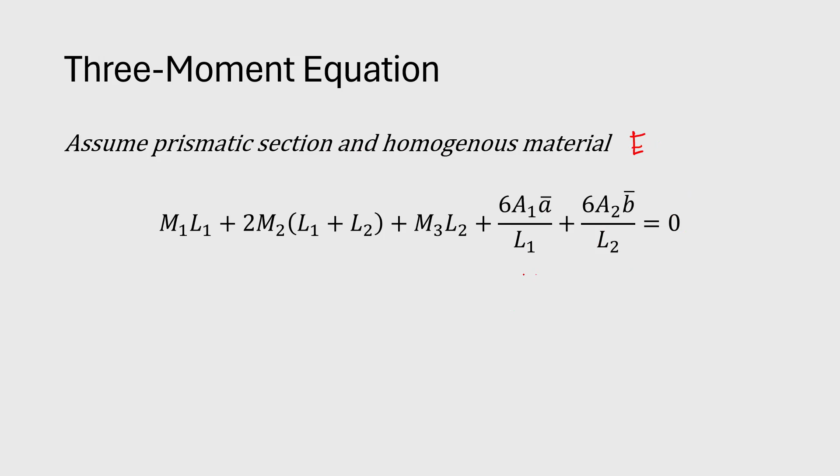But there's another formula existing, involved in the three-moment equation. This is the three-moment equation, but it is not equated to 0. We have an additional term on the right side of the equal sign: 6EI times H1 over L1 plus H3 over L2. So this equation considers the settlement, or the vertical displacement, of the three points.

So how do we define our three-moment equation? Let's say we have here a continuous beam. This is point 1, point 2, and point 3. This is based on what we learned in theory of structures to determine the internal moments of each support. This is what we'll call L1, this is L2. And M1 is the moment at point 1, M2 is the moment at point 2, and M3 is the moment at point 3.

Then 6A1 A-bar refers to our left span - considering the left span, that's 6A1 A-bar over L1. The actual calculation of that, I won't discuss in this video. Maybe I can create another video regarding solving our 6A1 A-bar over L1. So here, we'll just use the predefined formulas you'll see in the next slide: 6A1 A-bar over L1, and this one is 6A2 B-bar over L2. This is for the left span, and this is for the right span.

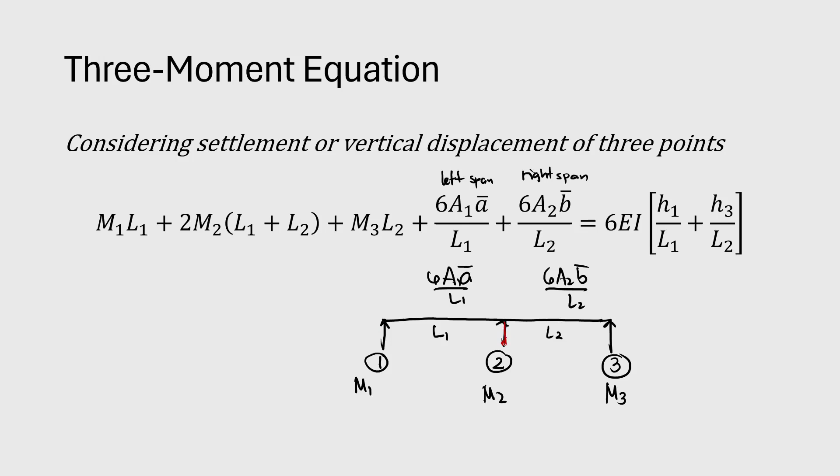Okay, now what do H1 and H3 mean? This is based on the positioning of our points 1, 2, and 3. For example, let's say we have a beam where the point goes down - let's say it experienced settlement or vertical displacement. So our beam becomes like this, and this is the new position of point 2, the new point 2. So now what we'll do is define H1. Our H1 is the vertical displacement of point 1 with respect to point 2.

Let's put a definition. H1 is vertical displacement - or vertical distance rather, instead of displacement.

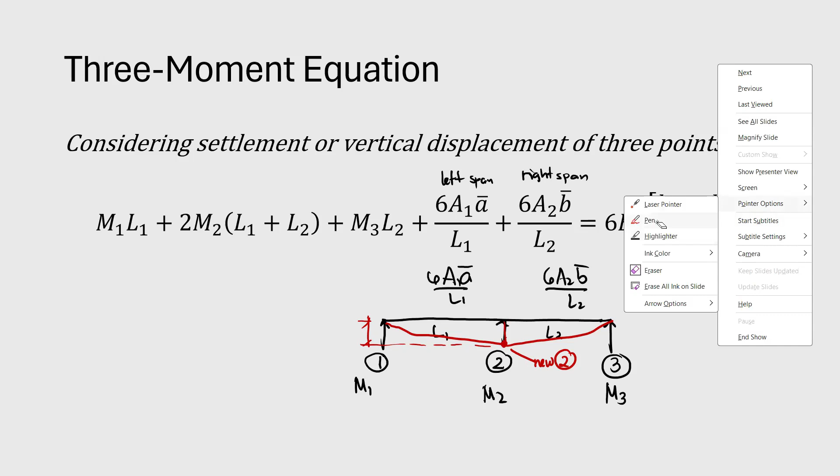Vertical distance of point 1 and point 2. Then, the H3, here it is. This is our H1, and this is H3. That is the vertical distance of point 3 and point 2. Okay, so that's how it is.

We're defining this. Now, how about the sign? The sign of H1 and H3 is based on the position of point 2 with respect to point 1 and point 3. Later, we'll explain how to do it.

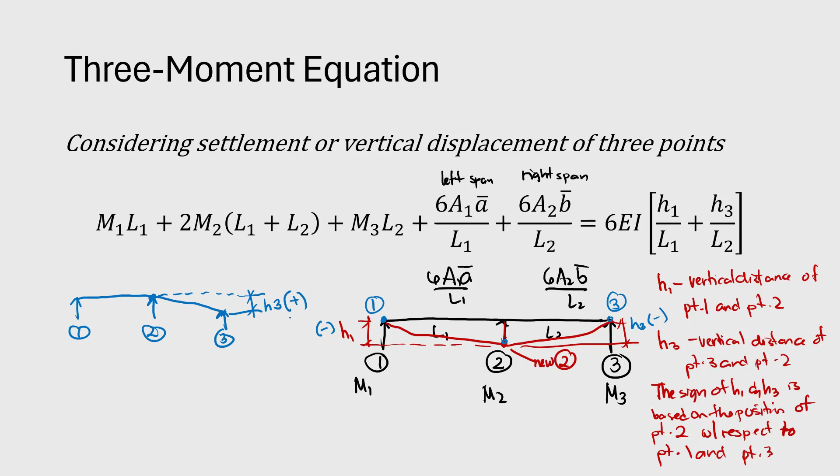Now we're ready to use this three-moment equation to solve for deflection. Let's have an example, very simple at first. By the way, we'll just use this three-moment equation as long as these formulas are given.

6A1, A-bar over L1, is already defined, so we won't consider very diverse loadings here because that would give us a very difficult discussion. Maybe I'll create a separate video regarding computing that. 6A1 A-bar over L1, and 6A2 B-bar over L2 — these are the predefined formulas we can use.

Aside from that, another limitation is we can't solve for the location of our maximum deflection here, especially when the loadings are not symmetrical, or when the loads on our beam are a bit complicated. It is possible, but it would take a lot of time to discuss. But in most problems given to us in the board exam and in our quizzes, it's mostly simple supported beams and cantilever beams, and the location is defined.

Instead of looking for the location of maximum deflection, what we can solve here is, for example, given the position or point where you want to get the deflection — for instance, what is the deflection at a distance of 3 meters from the left support or from the right support? If that's our problem, we can solve the deflection. But the maximum deflection location, especially when it's non-symmetrical or the loadings are very diverse, we won't focus on that using the three-moment equation, okay?

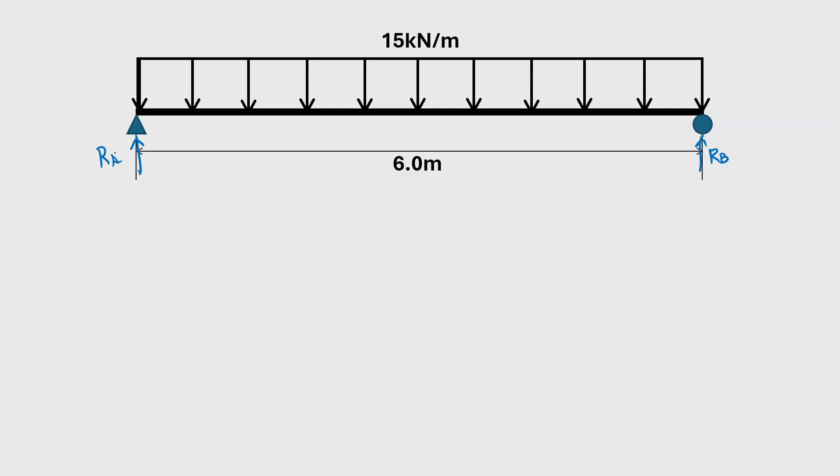So let's have an example. Here's our uniform distributed load, with a simply supported beam. First, let's analyze this beam. Our beam has a reaction RA and also a reaction RB here. When we compute this reaction, it's just half of the total load. So this is 45 kilonewtons, and this is 45 kilonewtons.

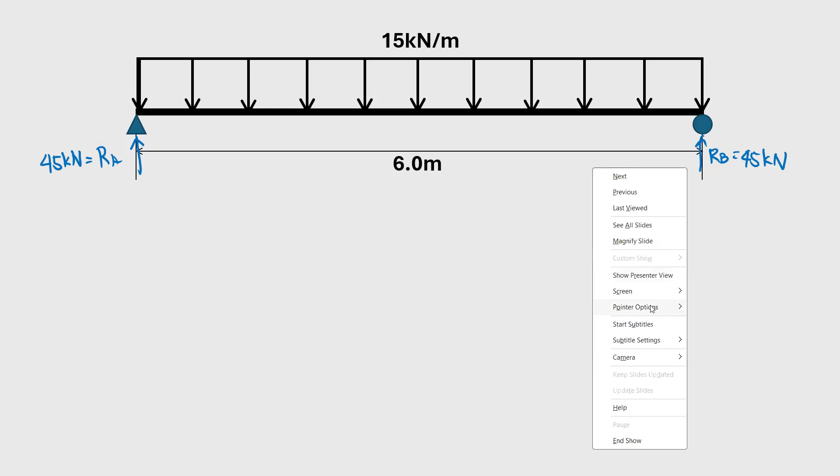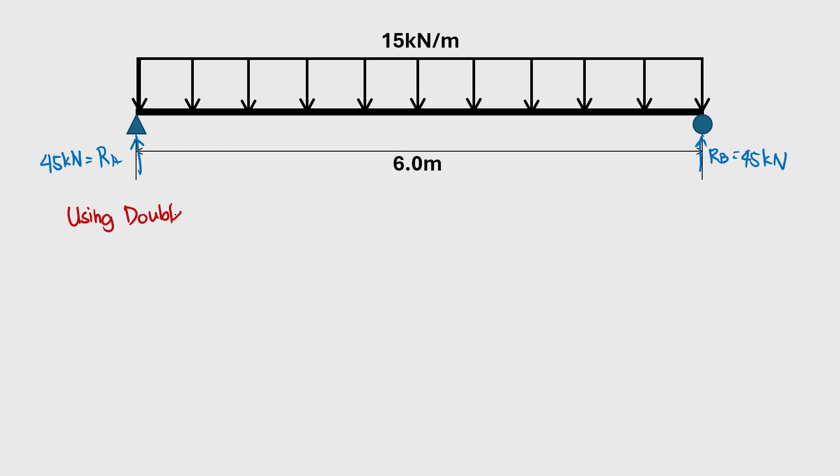Okay, so let's use a different method first to determine the deflection of your beam. One of the most efficient methods, for me, is using the double integration method. Using this method, we get the deflection all throughout the beam — just one formula, then whatever distance or location you want, we can get the deflection. The tricky part about it is getting the equation; if we make a mistake in the equation, we'll be wrong in getting the deflection of our beam.

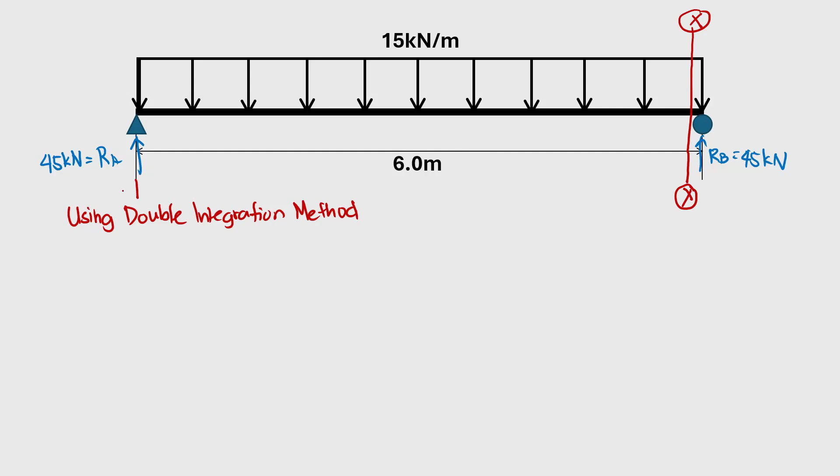So what we do in double integration is we cut here, at the point nearest to the end. Let's name it section XX. Then we assume that on the other side of that section is our starting point, where x equals 0. So let's mark this as our starting point of analysis. Then, from this point to our section XX, the distance is x. Okay, so let's label the distance x.

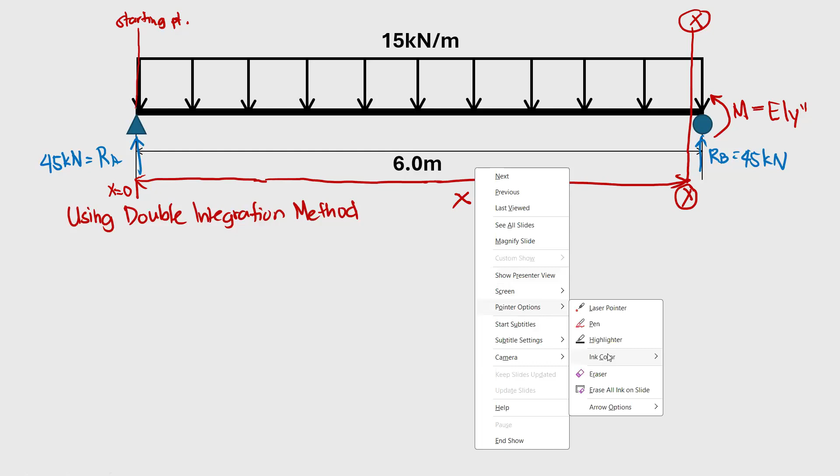After that, we release the internal moment at that section XX, and this internal moment is equivalent to EI y double prime. So we do static analysis through summation of moment at that section XX to get our moment equation.

So summation of moment at section XX equals 0. My way of calculating is clockwise equals counterclockwise. All clockwise rotations at that point go on the left side, counterclockwise on the other side. For example, the 45 kilonewton multiplied by distance x, aside from that, wala na, so we equate.

Our counterclockwise is EI y double prime, plus our uniform load, that is 15 times x over 2. So our equation now is EI y double prime equals 45x minus 15x squared over 2, or let's simplify it to 7.5x squared. This is our moment equation.

Next, we integrate that. When we integrate, we get what's called the slope equation. So our slope equation is EI y prime equals 45x squared over 2 minus 7.5x cubed over 3, plus C sub 1. This is our slope equation.

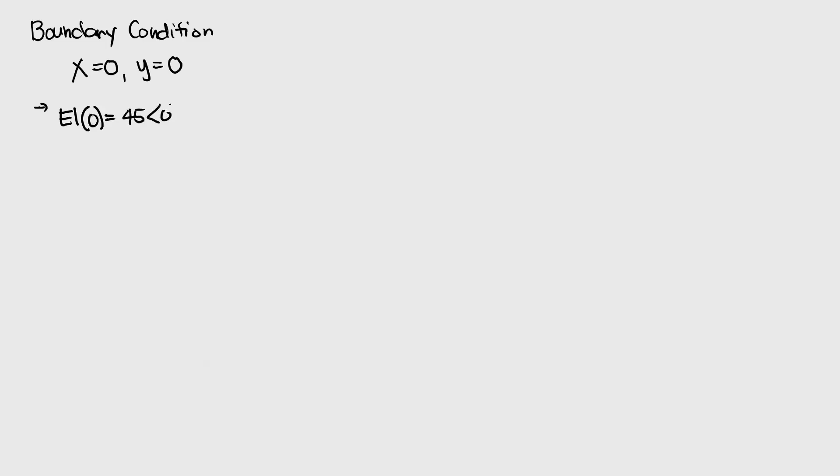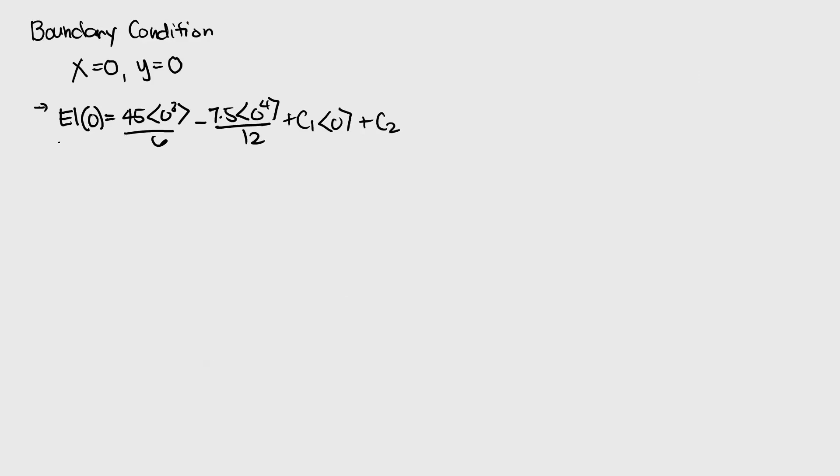Substituting this into our deflection equation, we get EI times 0 equals 45 times 0 cubed divided by 6, minus 7.5 times 0 raised to the fourth power over 12, plus C sub 1 times 0, plus C sub 2. Everything cancels out, so therefore C2 equals 0.

Another boundary condition is when x equals 6 meters, at the other end of the beam, y equals 0, since we're talking about deflection. Substituting these values into our deflection equation: 45 times 6 cubed divided by 6, minus 7.5 times 6 raised to the fourth power over 12, plus C sub 1 times 6, plus C sub 2. These terms are 0, so therefore our C sub 1 is negative 135.

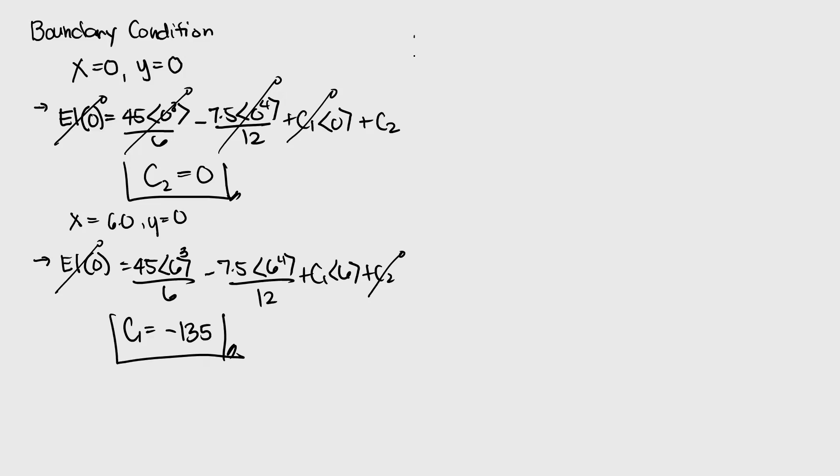After determining this, we can now solve the deflection. For example, find the deflection at midspan, where our distance x equals 3.0 meters. Just substitute into the deflection equation: EI y equals 45 times 3 cubed divided by 6, minus 7.5 times 3 raised to the fourth power over 12, plus negative 135 (our C sub 1) times 3, plus 0 for C sub 2. So our EI y is equivalent to...

negative 2025 over 8, or our y is negative 2025 over 8 EI. This is our final answer, the midspan deflection.

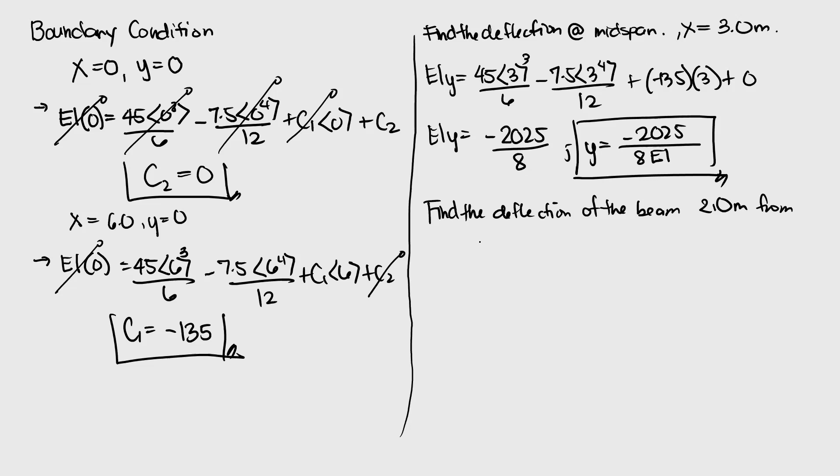Next, find the deflection of the beam 2 meters from the support. This means x equals 2.0 meters. Substituting into EI y equals 45 times 2 cubed over 6, minus 7.5 times 2 raised to the fourth power over 12, plus negative 135 times 2, plus 0.

So our y here is negative 220 over EI. That's how we compute the deflection using double integration.

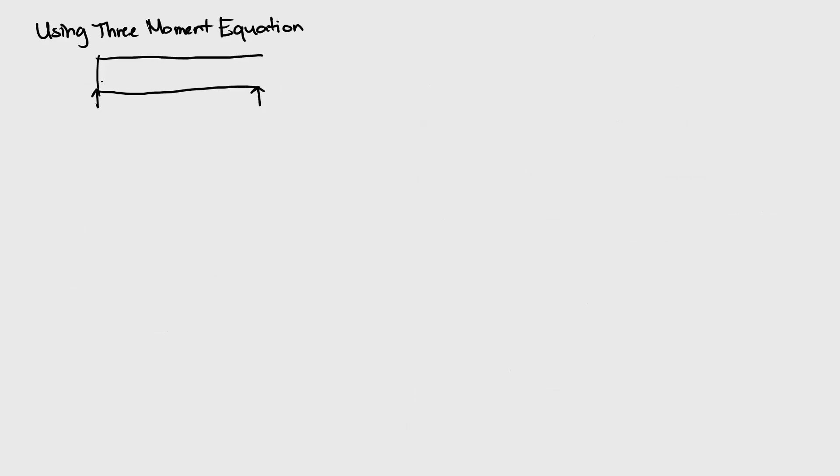Now we will start solving the deflection using the three-moment equation. First, let's draw the beam, carrying a uniform load of 15 kilonewton per meter, with a length of 6 meters.

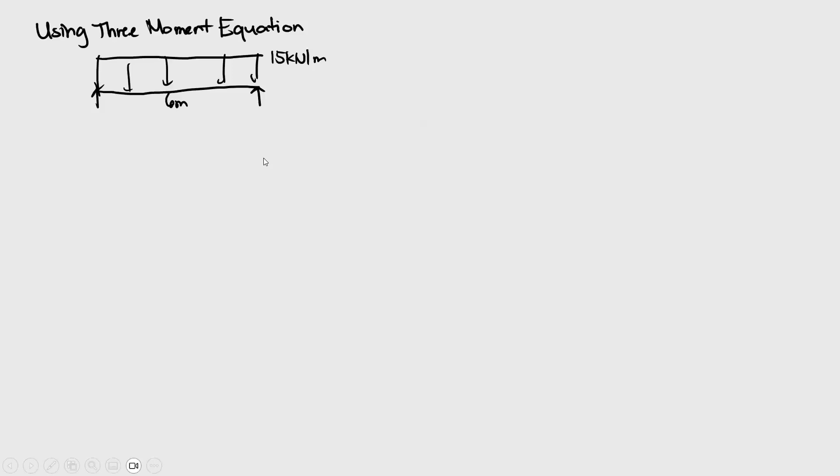So next, i-drawing natin yung ating deflection, exaggerated na deflection. Alam naman natin na deflection at midspan. Ito yung pinaka-maximum deflection, or let's say Y.

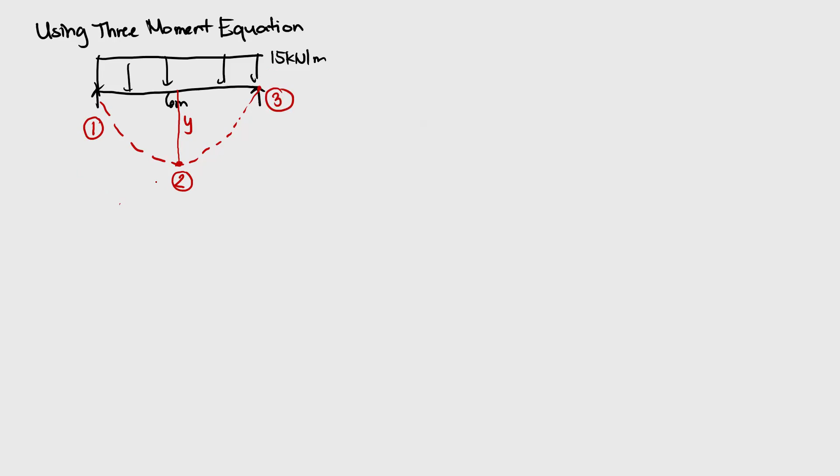Dito, pagka gagamitin natin yung three-moment equation, yung isang point natin, kasi alam natin pag three-moment equation, tatlong support. Eh kaya lang, yung simple supported din, dalawa lang. So paano na? Isang point natin ay yung kung saan natin computin yung deflection natin. Therefore, ito yung magiging point 1, ito naman yung magiging point 2, and ito yung magiging point 3 natin. As you can see, meron ng vertical displacement or vertical distance yung ating point 2 with respect to point 1 and point 3.

So after defining this, makukuha na natin yung ating L1 tsaka L2 natin. Ito yung L1 natin, that is 3 meters. Yung L2 natin ay 3 meters din. Dito yung ating 6A1, A bar over L1, at ito naman yung 6A2, B bar over L2.

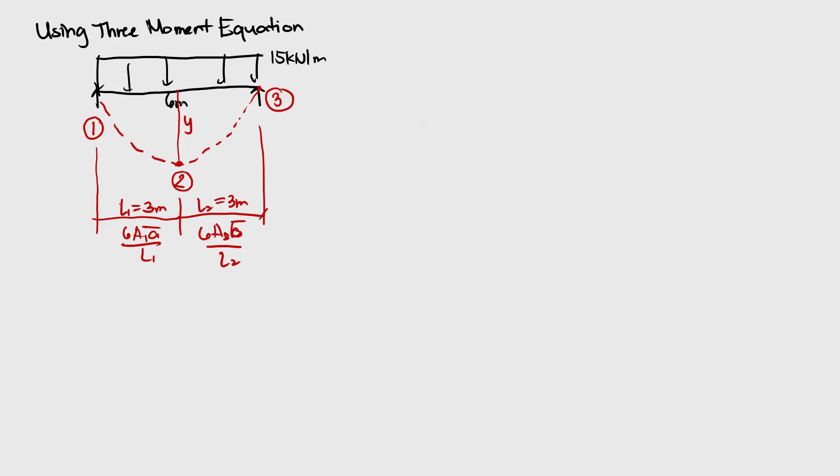Then kailangan natin computein yung ating moment. M1, yung moment pagka sa support ng simply supported beam, lagi yan 0. 0 kilonewton meter. Then yung M3 din ay 0 kilonewton meter. How about yung M2? M2 naman, that is the moment at midspan.

May formula tayo dyan, that is WL squared over 8. If you don't know the formula for the moment at midspan ng UDL, or uniformly distributed load sa simply supported beam, you can try using shear moment diagram para lang makuha yung moment, or by cutting the beam at this section at midspan.

So by substituting yung ating mga given values doon sa formula ng moment, that is equivalent to 15 times 6 squared over 8. So ito ay equivalent sa 67.5 kilonewton meter. Positive yan yung moment natin at midspan. And then after determining this, pwede na nating i-determine yung ating location deflection natin, yung para sa H1 and H3 natin.

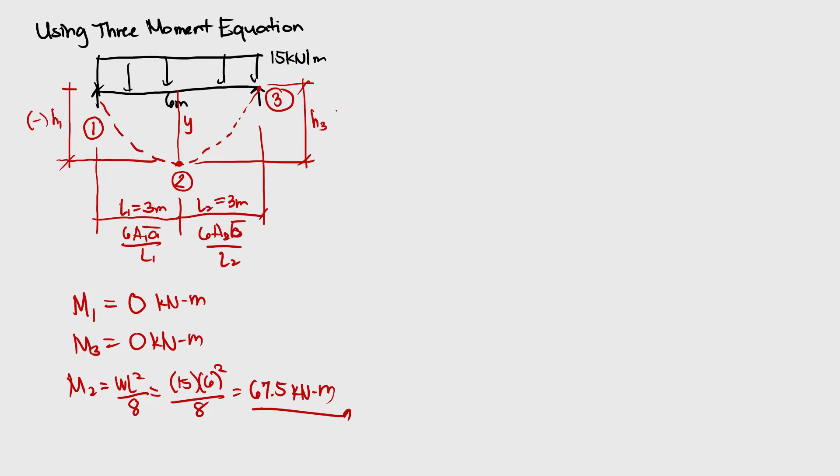Yung H1 and H3. As you can see, yung ating point 2 is below at point 1. Therefore, yung ating H1 ay negative, and yung point 2 natin is below din ng point 3, so ito ay negative. Okay, so using the three-moment equation,

Yung three-moment equation natin ay M1 L1 plus 2M2 (L1 plus L2) plus M3 L2 plus 6A1 A bar over L1 plus 6A2 B bar over L2, that's equivalent to 6EI times (H1 over L1 plus H2 over L2, or H3). H3 yan.

As you can see, yung ating moment sa 1 at 3 ay 0, so itong term na to ay pwede natin i-cancel out, magiging 0 na lang. So substituting yung ating mga values, 2 times, yung M2 natin ay 67.5.

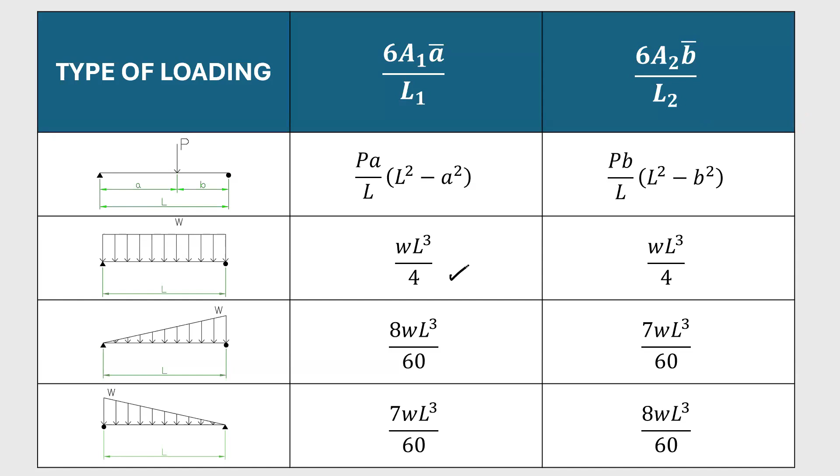Yung L1 natin ay 3 meters, L2 ay 3 meters, plus yung 6A1 A bar, ito yan, ang pagkakinat natin sa gitna, at napapansin nyo ay uniformly distributed load. So yung span natin at the left span ay uniformly distributed load. Using this formula, WL cube over 4. Full load, yung ating span with UDL. Gagamitan lang natin siya ng formula, WL cube over 4.

So ganun din yung sa right span, yung formula din dito ay WL cube over 4 lang din. Right span, ha? Sa right span, ito lang din. Pareho lang talaga ng formula, WL cube over 4.

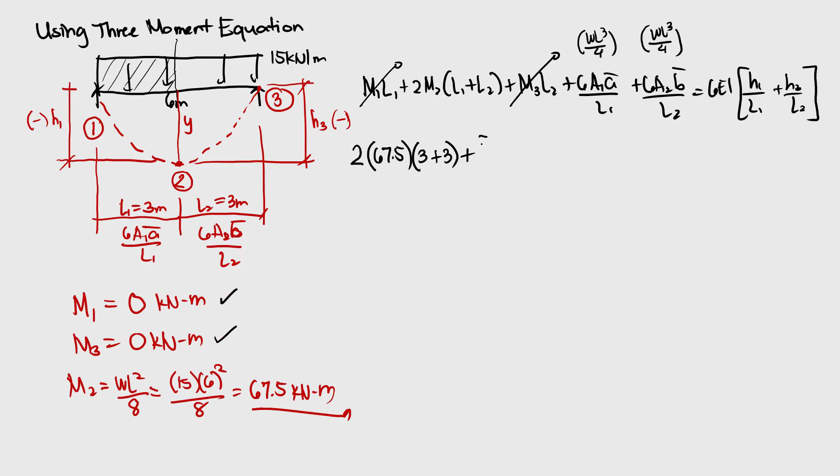Okay, sa substitute natin, so we have 15 times. Don't forget, yung L na gagamitin natin ay base dito, sa L1, hindi yung full span ng beam. Kung ano lang yung pinaka-span na kinoconsider natin ng L1, or yung left span, that is 3 cube over 4.

At saka ganun din dito sa kabilang side, pareho lang naman sila, cube over 4. And that is equivalent to 6EI times yung H1 natin, assuming that ito ay Y, kasi pareho lang naman sila ng distance. Isa lang naman yung location nila, kasi yung point 1, point 3 natin ay same position. So ito ay Y over 3 plus Y over 3.

Okay, so next is makukompute na natin yung Y in terms of EI. So solve muna natin itong nasa left side ng ating equal sign. Na-solve din natin yung nasa kabilang side ng equal sign.

Ito ay magiging 2 times... don't forget, sabi natin H1 and H3 ay negative, so dapat negative Y pala ito. Take note, negative Y ang gagamitin natin. So 2025 over 2 is equivalent to... ito naman ay magiging negative 4Y EI. So therefore, yung Y natin ay magiging negative 2025 over 8 EI.

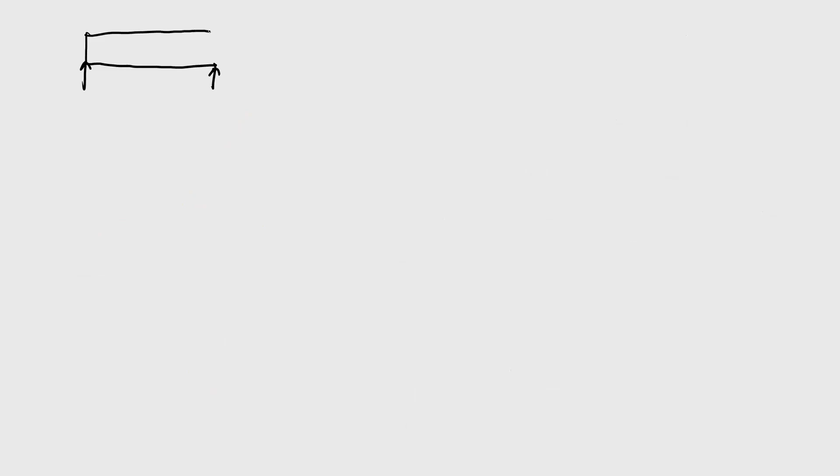Sir, paano naman yung 2 meters from the left support? Okay, so drawing natin ulit. Ito ay 6 meters, 15 kilonewton per meter. Tapos exaggerated natin yung deflection.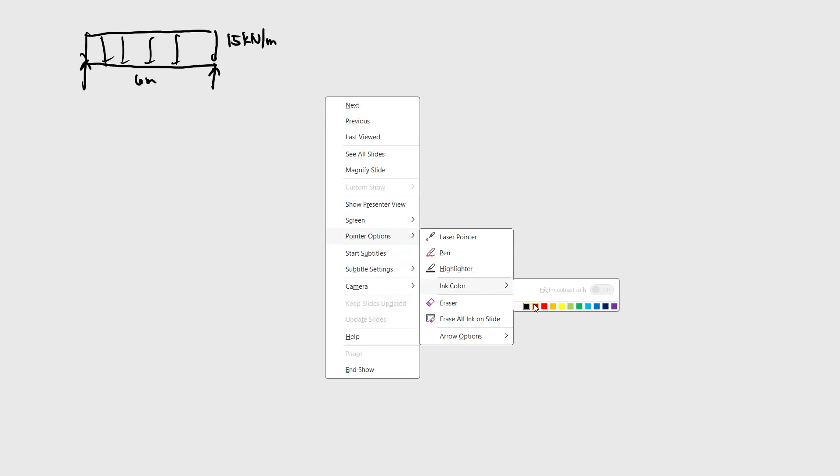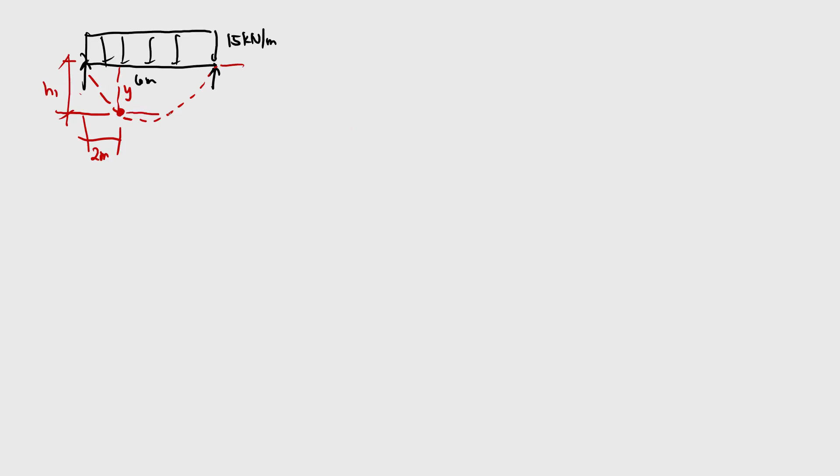So 2 meters daw from the left support, so ito yung magiging point natin, kasi ito yung hinahanap nating deflection. So ito yung magiging Y natin, and ito yung magiging H1, and ito yung ating magiging H3. So pantay pa rin naman sila. So let's say this is negative Y, ito ay negative Y din. Okay, then yung ating magiging span, ito ay magiging 4 meters. So ito yung magiging L1 natin at ito yung magiging L2. Ito yung magiging left span, ito yung magiging right span natin.

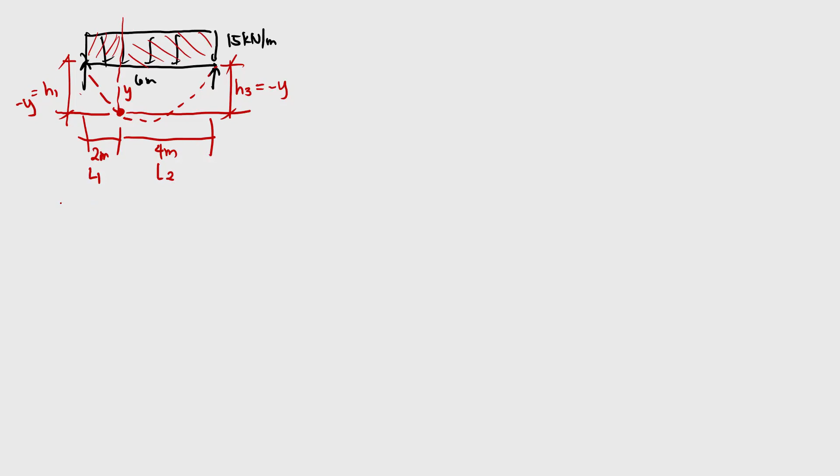Okay, yung M1 natin, compute natin. Actually, M1 tsaka M3 ay 0 pa rin, hindi naman magbabago yan. Then how about yung sa M2? What is the moment at point 2? Sabi nga natin, ito yung point 1, this is your point 2. So gawin natin, ikat na lang natin yung section, and then kunin natin yung moment dito. So ito yung ating magiging M2.

So using the calculation, summation of moment at point 2 must be equal to 0, so clockwise equals to counterclockwise. So yung clockwise rotation natin, di ba may reaction tayo dito, yung RA natin ay 45 kilonewton. So that is 45 times 2 meters, times 2 meters.

Tapos yung ating uniform load, tsaka yung ating M2 na counterclockwise. So M2 plus 15 times 2 times 2 over 2. So therefore, yung ating M2 dito ay equivalent sa 60 kilonewton-meter. Okay, so nakuha na natin yung moment and then pwede na tayong mag-calculate ng ating deflection.

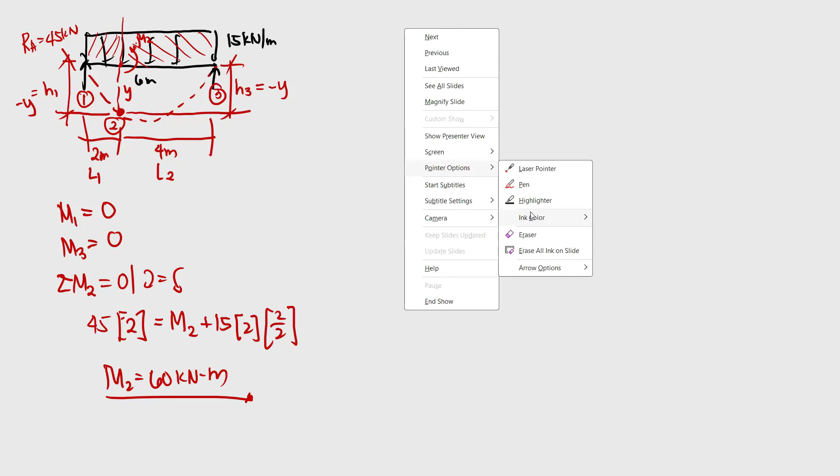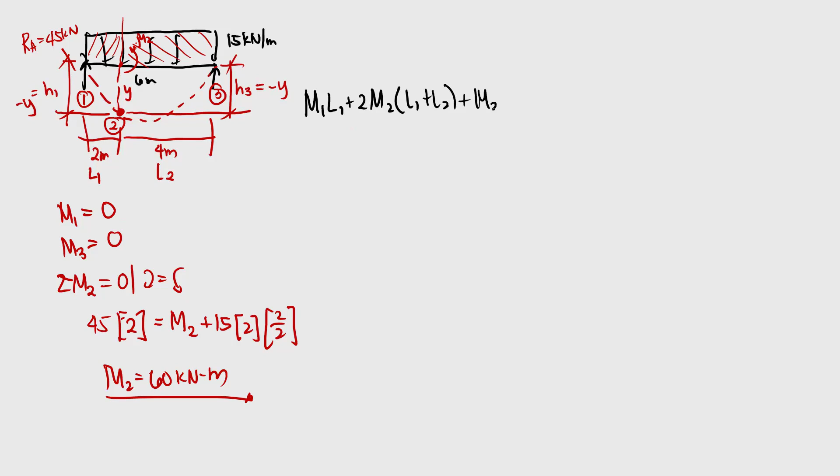So let's compute. So we have M1L1 plus 2M2(L1+L2) plus M3L2 plus 6A1 a bar over L1 plus 6A2 b bar over L2, that is equivalent to 6EI times (H1 over L1 plus H3 over L2). So sabi natin M1 tsaka M3 ay 0, cancel out.

Substitute natin, yung M2 natin ay 60. L1 natin ay 2 meters plus 4 meters, plus ito ay WL cube over 4 pa rin. Kaya lang, yung basis natin ng L ay yung sa L1. So ito ay magiging 15 times 2 cube over 4, plus yung isa naman ay 15 times 4 cube, kasi yung L2 natin ay 4. Then that's equivalent to 6EI times negative Y over 2 plus negative Y over 4.

So therefore, solve natin yung itong nasa left side natin, we have... ay 990. And in the other side, ito naman ay negative 9 over 2 Y EI. So therefore, yung Y natin dito ay negative 220 over... So that is now the final answer.

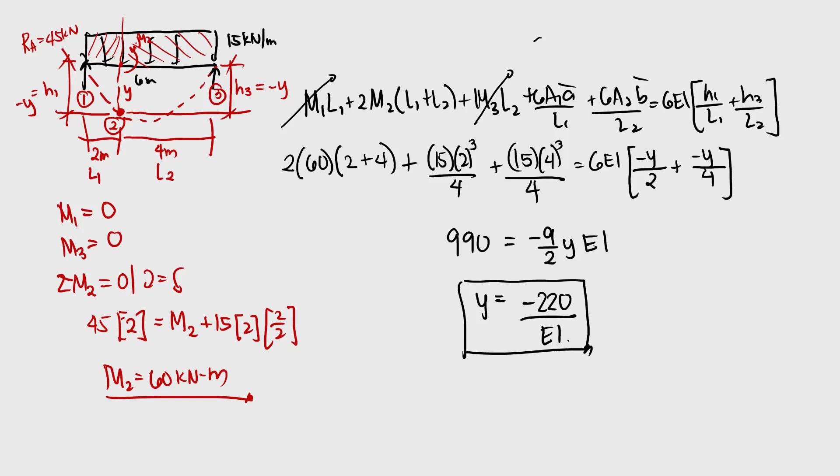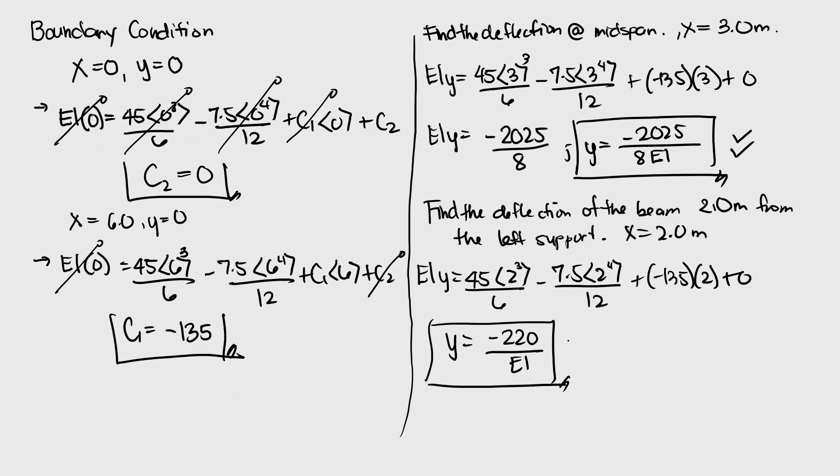So as you can see, same din yung nakuha natin using the double integration method. So now, tingin niyo, kung isang deflection ng isang location lang naman, mabilis talaga, moment, three-moment equation. Pero kung multiple position naman, at pag-compute ng maximum deflection, maganda talaga ang double integration. But again, it is case-to-case basis, and yung limit lang natin sa paggamit ng three-moment equation is pagkuha ng mga mid-span deflection, yung mga may location na, given na yung location natin. Madali lang siya, mas mabilis mag-compute ng ating deflection. So that's the power of using the three-moment equation.

So you can use it now. Kalimutan nyo na yung purpose ng three-moment equation na pwede lang siya pang solve ng indeterminate structures. Actually, kaya din niya mag-solve ng deflection. Sa next video ay i-discuss naman natin pagkuha ng deflection kapag cantilever method. Okay?